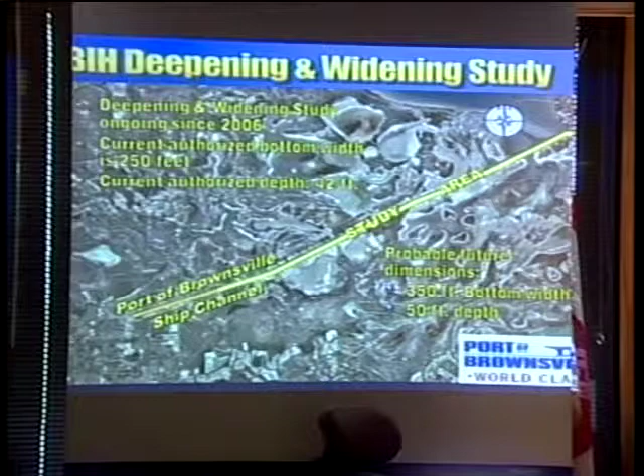Mr. Chairman, Board Commissioners, as has already been informed, there's been a lot of activity at the port. The first thing I'm going to report is just an update on where we are with the deepening and widening study. There haven't been a lot of major steps yet, but one of the main things we achieved this month was that we finally got the schedule to work.

A couple of things I did want to mention quickly: the shoreline wave impact analysis, we finally got comments, we responded to the comments, and they gave us back some additional minor comments. So by the end of this week, we will have that shoreline wave impact analysis completed.

The rig movement geometric study that was done had been completed several months ago. Last month we got a comment that they wanted to make a minor wording change in the report, so that is being done and completed as well.

The employment benefits analysis, to include the benefits of employment into the study, was scheduled to be completed on the 15th, but due to some delays in getting information from the lessee, the consultant is now telling us they will complete everything by June 22nd, which is when they will submit their final draft to us. Then we would work on getting that to the Corps immediately thereafter, so the Corps can also provide their comments, and then we can get that finalized.

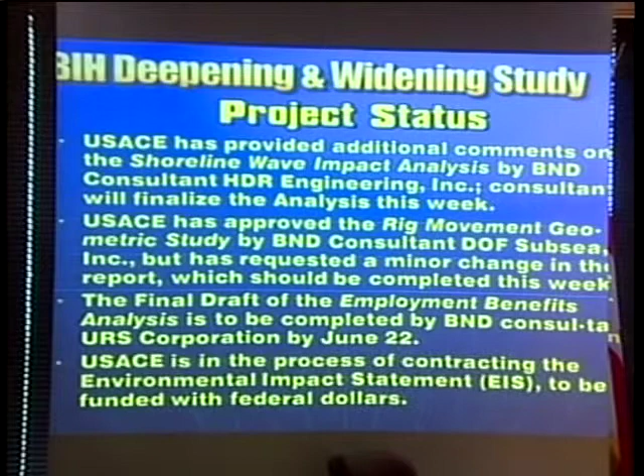And I've already informed you a couple of months that we're pushing the Corps to initiate the environmental impact statement study. There was even some possibility of us doing some of the funding, but this has to be done with federal dollars according to them, so it's still in their hands, but they were getting ready to initiate that within the month of June, so hopefully by the next time I report to you, we'll have that already underway.

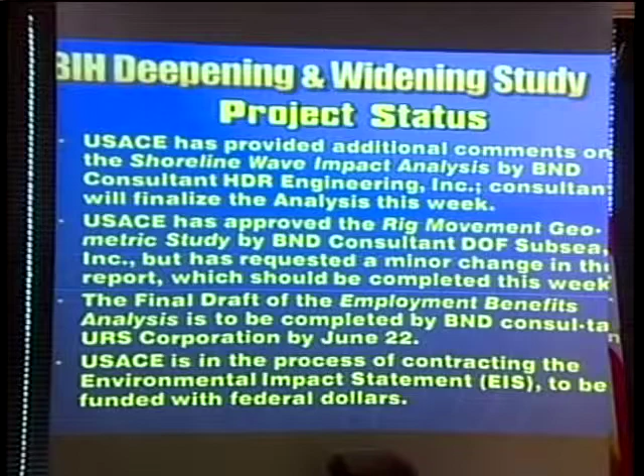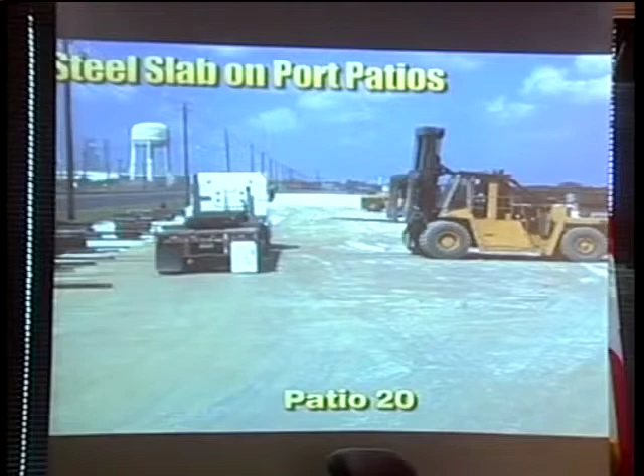One of the things we wanted to mention in conjunction with the finance report a minute ago is the steel slab that's been placed on port patios. Patio 15, as you can see, is already pretty much full with steel slab. 15 South has also been filled with slab, and here on Patio 20 we have slab coming in — this is one of the heavy activities we're having here at the port. Here you see a little bit of the activity with the forklift lifting it out of the trucks.

The first construction project we already reported to you was that Shed 1 was completed. Now we report that Shed 14 repairs have been completed here. This is shot up in the area — this is the area of the repairs.

All these that you can see - that's of course our maintenance director, right there inspecting together. And this is another shot.

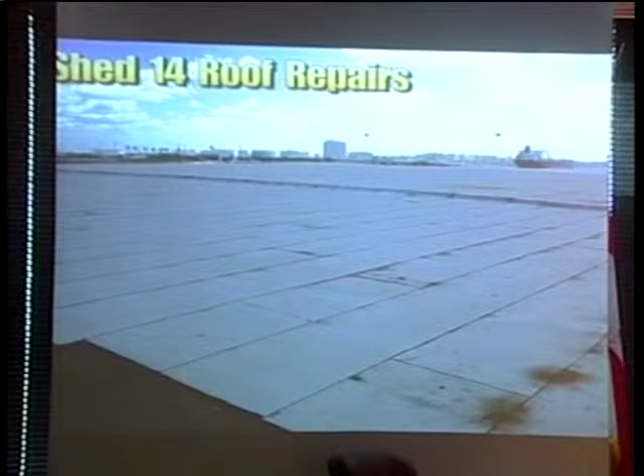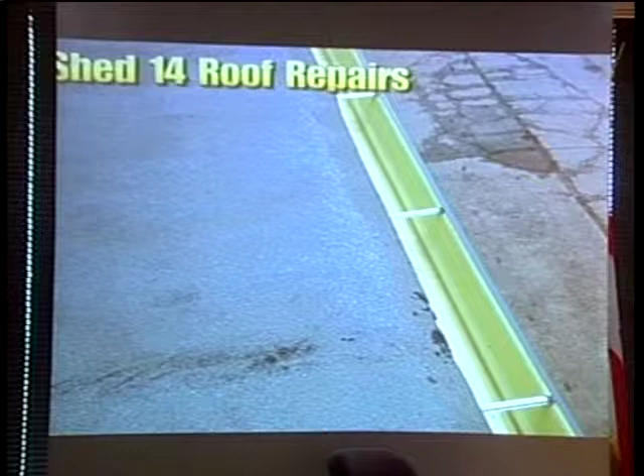Here you can see the new gutters that were installed, along the south side next to the rail. And this is a close-up of the new gutter there. Here's the gutter on the north side. That's basically a ship that was docked over there on dock number 3.

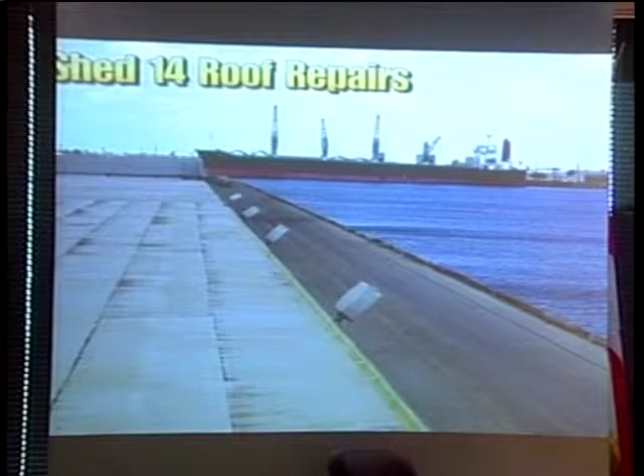The day of the pictures. Another project is this one being done in-house, the Mervis drainage project.

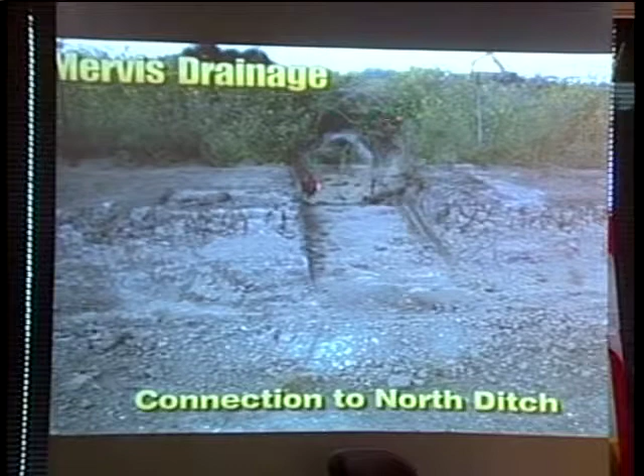We had a situation here where they had a ditch that was ponding and not draining properly, so we opened up a connection to a ditch. This ditch needed to be deepened, which is basically this ditch. Here's what I just showed you right now, and the water flows in this direction, which is basically southeasterly.

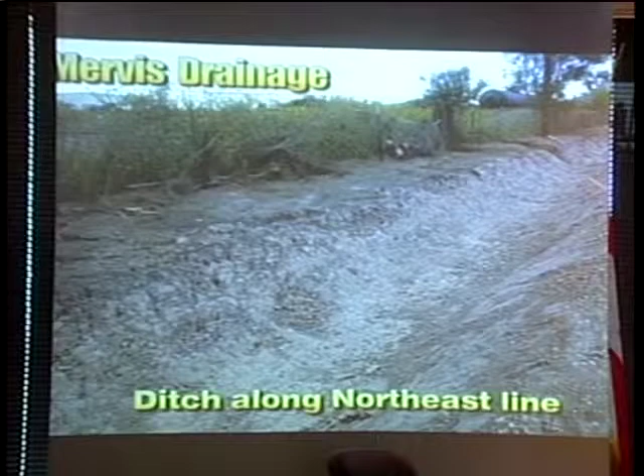Into this inlet - originally the ideal situation would have been to put a ditch all the way across here, but because there's rail here and BRG is contemplating putting another rail spur in this area, we couldn't leave a ditch, so we had to use a pipe, crossed under here.

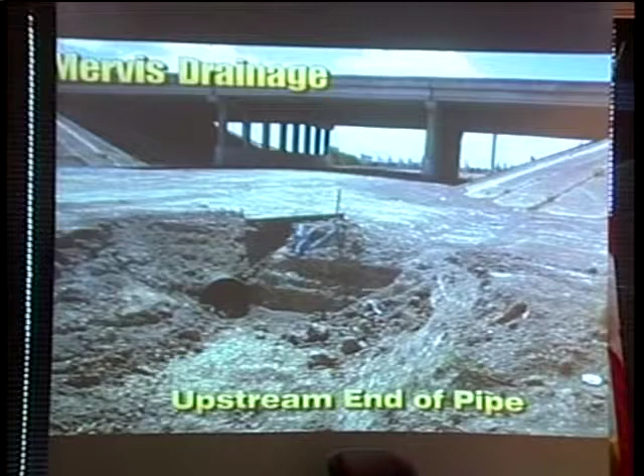This is the inlet on the northwest side of 48. This is the outlet on the southeast side of 48, and this is the ditch that leads into the main drain right here. This is now looking south, and this is the main drain.

Here's the port area right now, something being done in-house. We're waiting for a structure that's going to go right at this location, and this area is going to be filled. This ditch is not going to be there anymore.

We're going to have an inlet here that drains into this pipe, which is also going to be lowered and then discharging into the main drain, which is this big ditch right here.

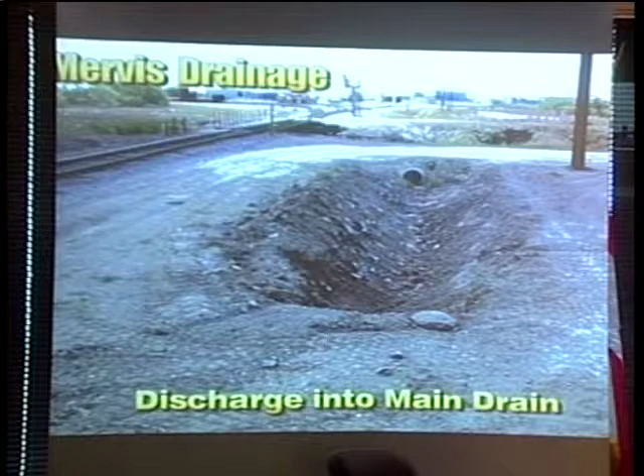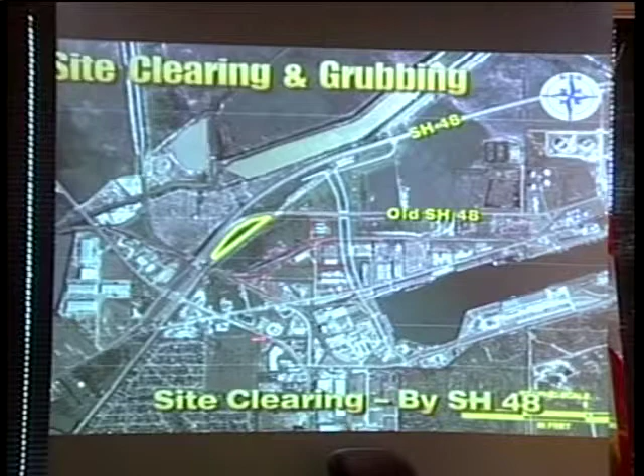Another project we are working on with in-house forces is site clearing and grubbing in different areas. One of the first areas I'm going to show you is this area right here next to Highway 48. Our maintenance crews have been clearing this area. I have just 4 shots that show you the whole panoramic view of the cleared area.

Then there are 2 other areas on the south side of the ship channel, east of Bay Bridge. This is the Bay Bridge lease, and there's an area here that was all full of brush, and the same right here. These 2 areas are next to Bay Bridge.

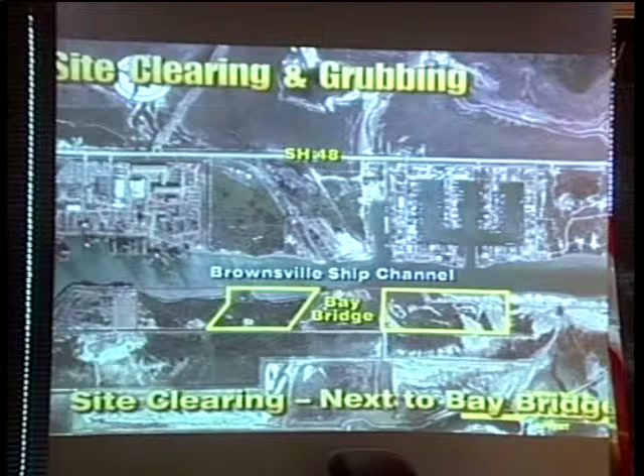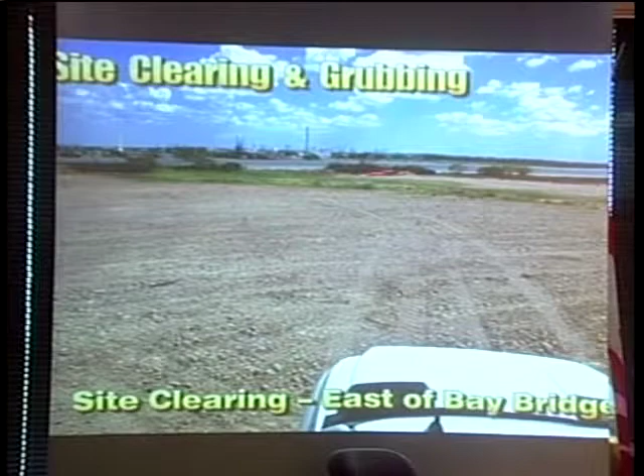These are just shots of the area cleared. Here, this is on the east side of Bay Bridge. And here is looking back down towards the ship channel, and this is back towards Ostos Road.

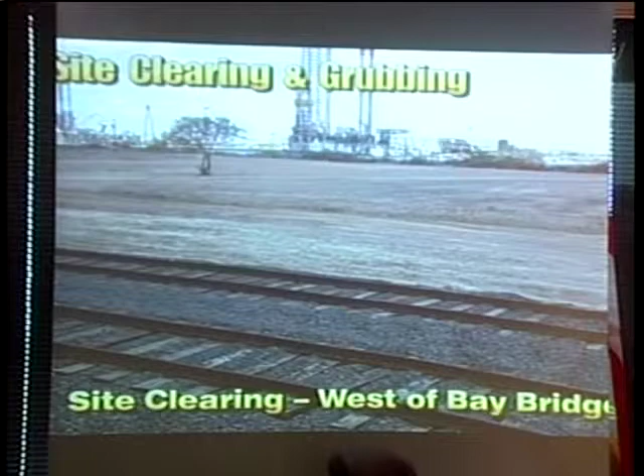This is basically the southeast area of that section, and here's the other area, west of Bay Bridge, with our own port maintainer working to clear that area. That's the whole area. Actually, at this time, there was a ship coming in, so we got a shot of that ship entering the port as well.

Here's a quick view of our - let me go back there. I hope I didn't mess that up. Of our maintainer doing its work. I shut off the sound - all you would have heard was wind.

Ariel, when you finish that, could you go back to the map that shows those 2 sites that we're working on? Ariel, on Highway 48, is that our crews doing that, or is that the state crew doing that?

Well, I'm going to show you another area where the state is working. The one I showed you was done by our crew. The state is working a little bit further east, getting rid of the ramps and all that stuff.

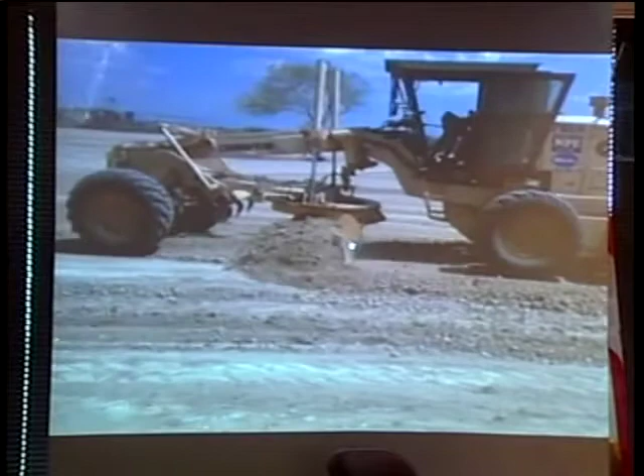Okay, what's this guy's name, Mr. Garza? Alan, there you go. Garcia - Alan Garcia is the one that's operating the maintainer.

And then if you look at it, the ship is right there, moving a little bit. That ship is coming into the port. Now, you want me to go back to the map? Let me go back to the map.

The point I wanted to make is that if you see the Rio Grande shredding, and then that other piece right there, that's the Fortune Ferris site currently under negotiation. This site here, you have Bay Bridge, and then you have this other site.

Those two sites are the only two left directly on the water of any significance that have utilities and all services in place. So we don't have much land left, and that's why we need to be selective about tenants. Anything beyond that, whether on the south side or north side to the east, will require utility extensions and infrastructure expansion. Everything else is under lease, except a little bit across the bay with a right of first refusal. So we're down to just a couple of spots left of land available, and the turning basin would be completely used up on the waterfront.

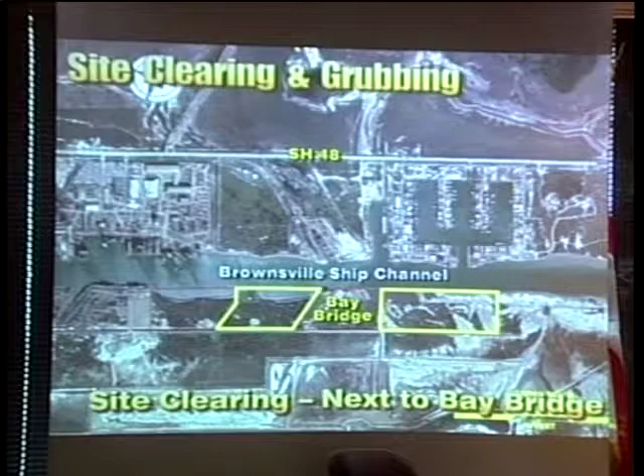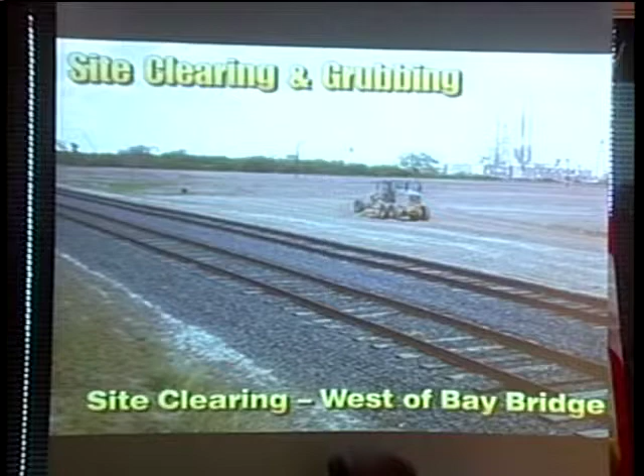So basically those are the sites. All these are in preparation, so we have them available to show. We think they'll show better that way. Absolutely.

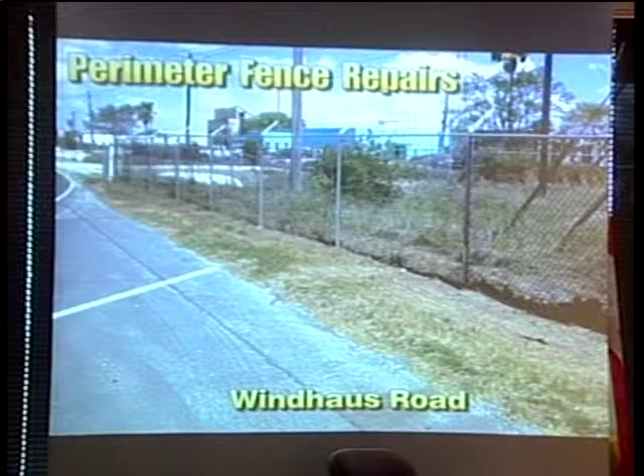So anyway, we'll skip this one now. Another issue, we've been doing some repairs to areas where we had problems with the fence. This is an area on Windhaus Road, and most of the repairs were on the barbed wire at the top. Here's a close-up of that. There's another section here where Milo and 511 used to intersect, and this is the area where the gate is a little bit east from here. But there are a lot more areas that, at the request of the Chief of Police, we didn't show you for security purposes, though they are being worked on and resolved.

Is that part of the fencing we applied for in the grant? No, this is just repairs. The other grant has been applied for, and some of the documents were being finalized today. I don't know when the deadline is. The 20th, but we got everything in today.

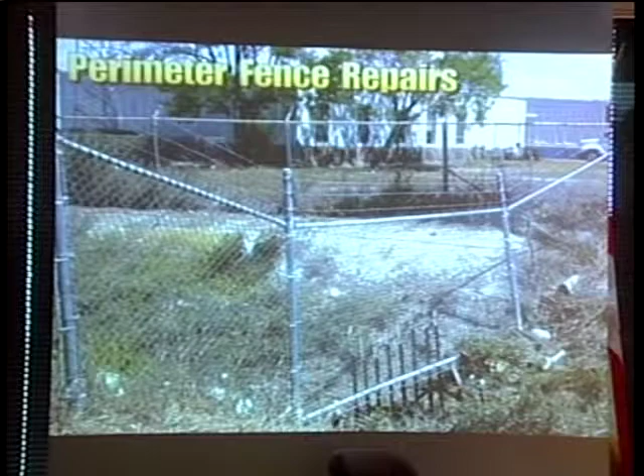This is our crews at an undisclosed location, finishing the repairs. We're continuing the work in the areas where it's needed.

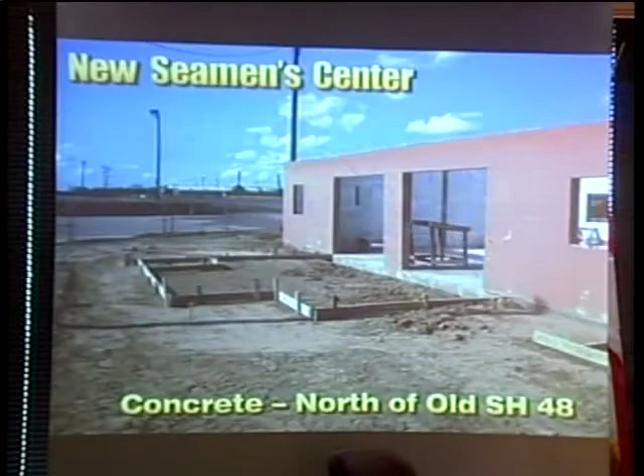Another project is, of course, the new Seamen's Center. You've got an item on the agenda today that we'll talk about when the time comes, but basically this is some of the work that has already been completed, some of the form work.

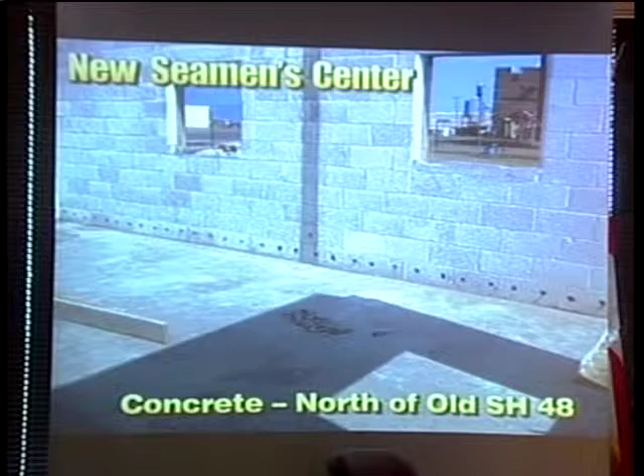Here we encountered an issue where there was no reinforcing on the walls. We selected one wall, the northern wall, and checked every section to make sure there was reinforcement needed, and none of the columns showed reinforcement. Here you can see the measuring tape coming in.

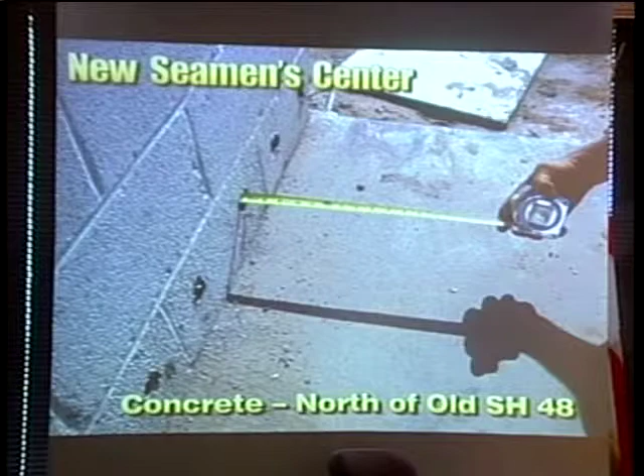So what you're saying is when we had the ribbon cutting and groundbreaking, it didn't fall on us, right? As windy as it was. In addition, we did go through a couple of hurricanes. More than a couple. We also had our own crews.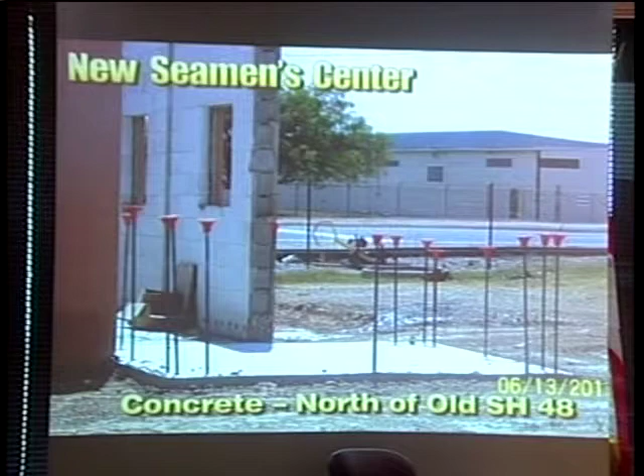This is the new area being added on the northeastern corner, that would be the Seamen's Center site. This is the steel reinforcing going up. Here we have some of our field crews working on the area up at the top of the pole, because we're cutting that service and putting it underground.

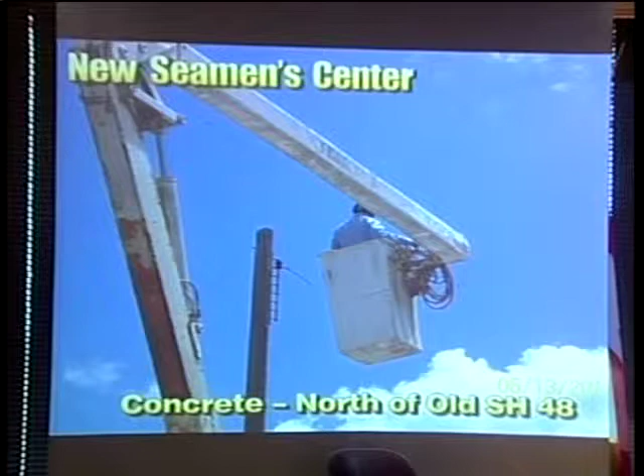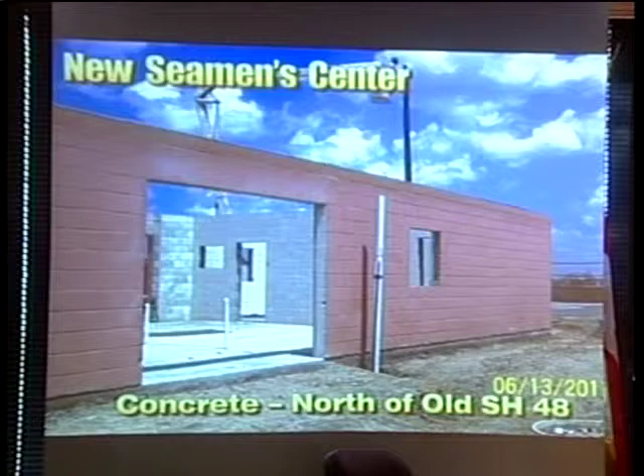There was an accident with one of the meters there, with one of the subcontractors hitting an existing meter and knocking it down. So our crews went ahead and cut everything off there. Here my lettering got in the way, but the guy's right there. That's part of the work we have on the Seamen's Center.

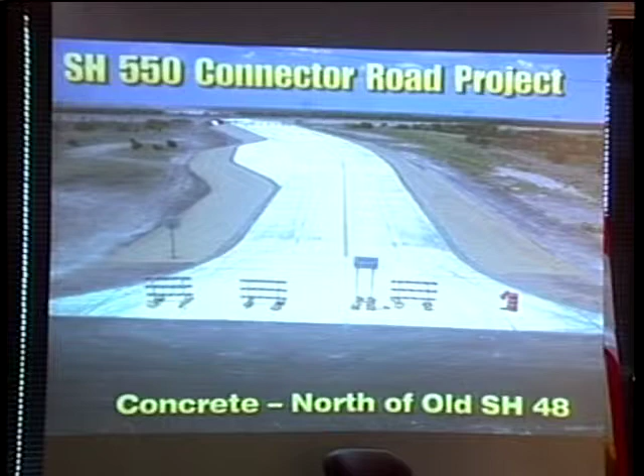On the connector road, it's basically completed here. We took our bucket truck and tried to get some shots from up in the air so we could get a full perspective of the whole project. This is the concrete area north of Old Highway 48, and this is sort of like a close-up.

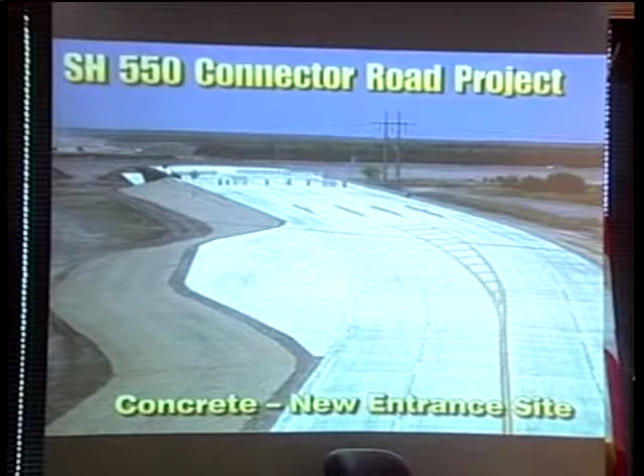Those barriers are where the new entrance gate will be. That's where the new guard shack will be, and it'll be a canopy. The new canopy will be located at that location, at that site.

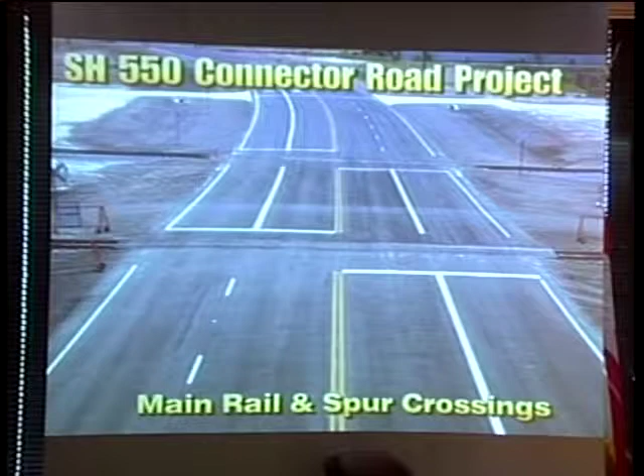Here's a look back into the port towards the south on the asphalt portion of the road south of Old 48. This is the main rail where they're going to be doing the automatic switching, and this is the rail spur that is there. This shot is from the Foust intersection with the Garva spur crossing right across that area.

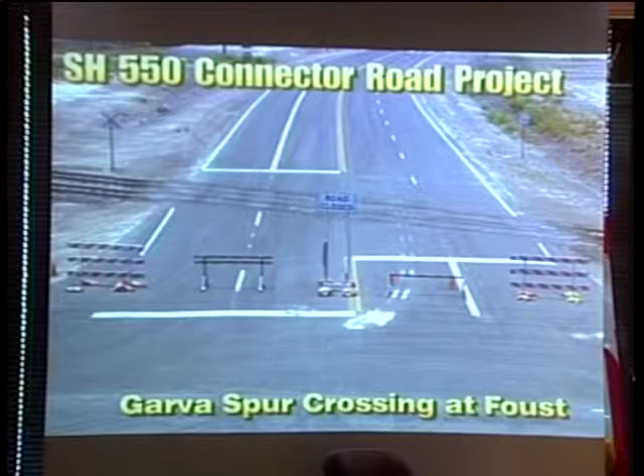So this is basically completed. We're waiting for the county to issue their partial acceptance on the portion to the south, but that's why we still have it blocked off right now. We do have a couple of tenants that use this to go in because it's their only access, but we're pushing the county to try to get that released to us.

So they asked the contractor to core it, and in fact, yes, some of the thickness that was supposed to be there, both of hot mix and base, was not there, so now they have to address that. That's basically where we're at with that, and as soon as we get that finalized, we'll be ready to close out the project. I didn't want to close it out leaving that pending, because it needs to be completed and in good shape before we actually close it out.

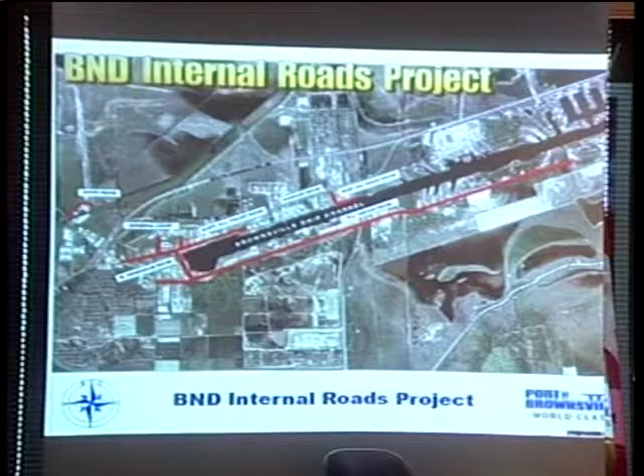So all the driveways are done? All the driveways are done. Everything else is done. It's just the remedial part on the problem areas that they have to finish.

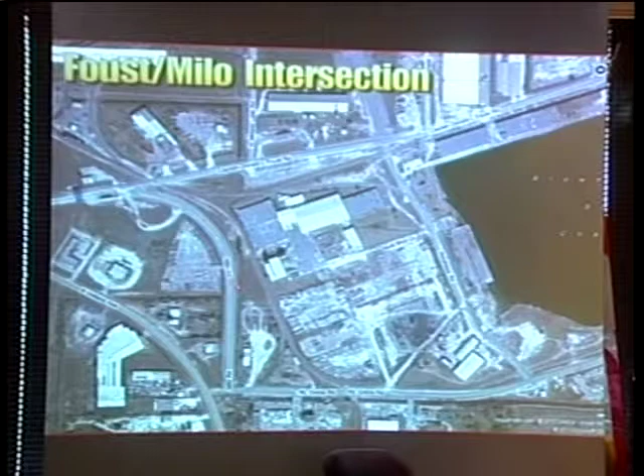Another project we're working on with a consultant from Houston is the Foust-Milo intersection. Everybody's aware of the strange angle at which Milo hits Foust. Here's a look of the area. That's an area that has been of concern for a while, and we are working with a consultant who developed several models and looked at several options.

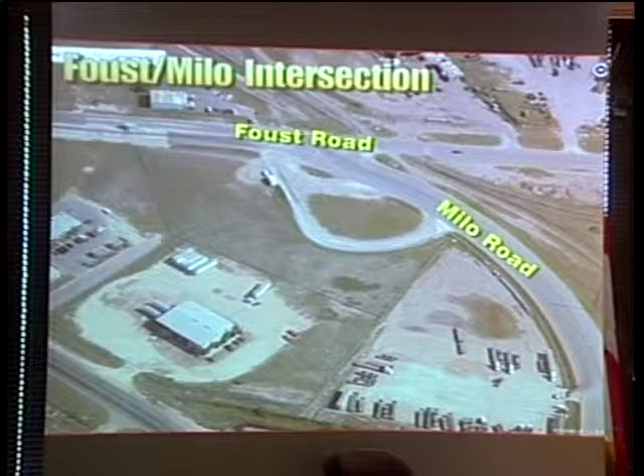Initially, he presented a redesign of the intersection using the existing pavement the way it was. But on the second iteration, he presented a new design where Foust Road would come in and turn and hit Milo at an angle. This is the result of traffic counts that were done through our cameras, through our own surveillance system.

Why don't they just go straight rather than come around? Right, come around and make that move. How come they can't go straight? Up at the very top, they're coming down and then going around? Because of the angle at which the oncoming traffic is.

One of the things we need to do with this is still kind of perception. We're going to need to have a workshop on this to actually look at all of the proposals. They're coming back to look at some additional comments and questions. I also think when we're ready, we're going to need to get all the stakeholders involved, because this is a major intersection. It's going to affect various folks, and we want to make sure we get a lot of input.

Even with that, it looks like they're going to wreck right there. We had some questions on what's come up even with that design. So when they have a chance to answer those questions, my plan is we need to have a workshop on this, and then go out into the port with the users and say, okay, there may be some things we're not catching.

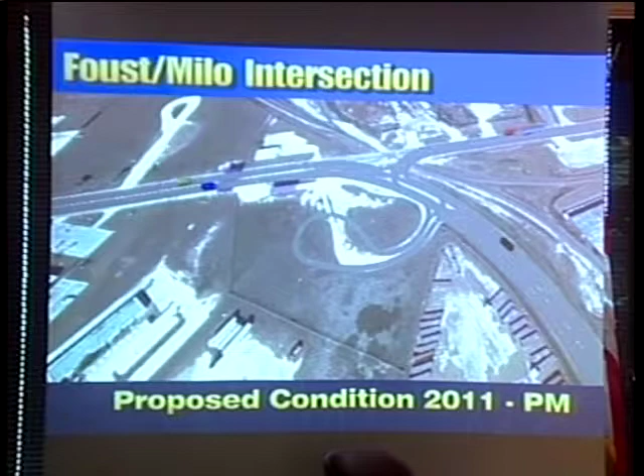Because you're going to have the command center here, right? You're going to have a road from here back there, somewhere in there. So we'll look at that.

The last project I'm going to show you is just an update of where we are with 550. Of course, the area we're looking at is the area right here that affects the port and backs up into

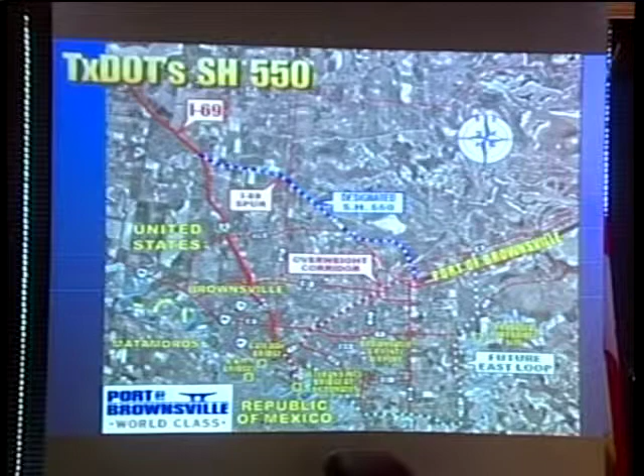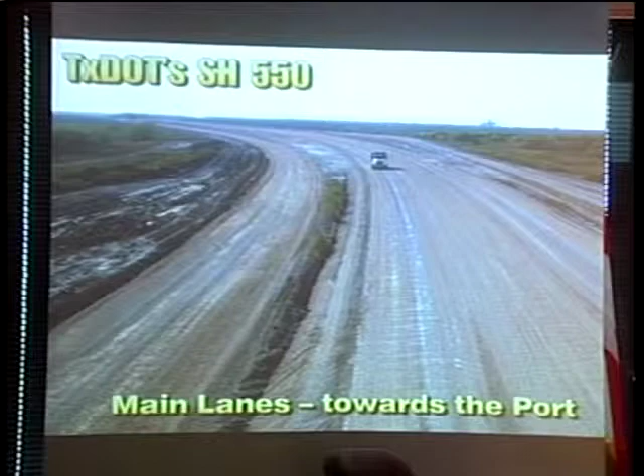3248. Here, this is a look at the main lanes looking towards 3248. This is a look back towards the port of the main lanes. As you can see, a lot of the area has already been surfaced with limestone, and that work keeps progressing.

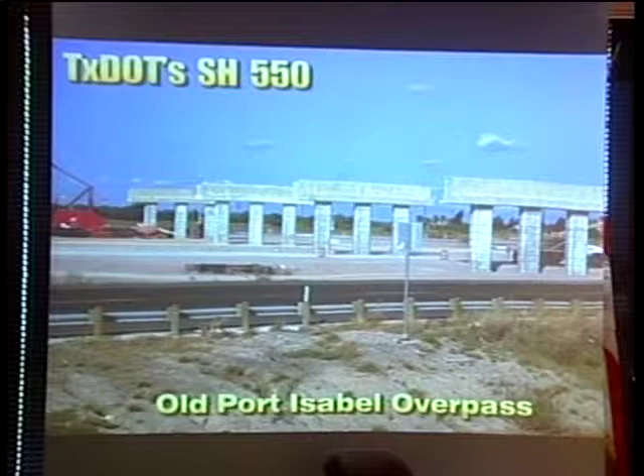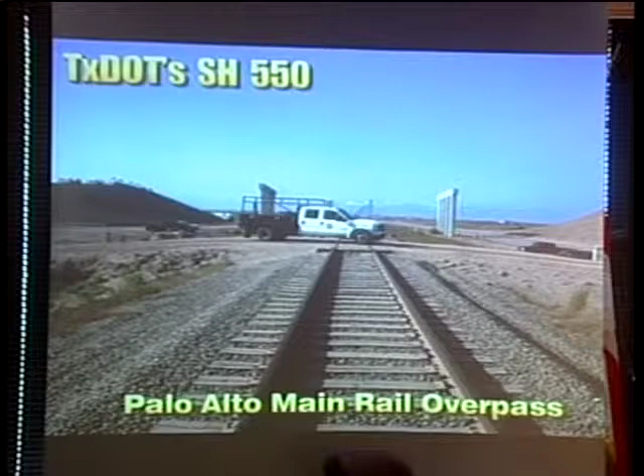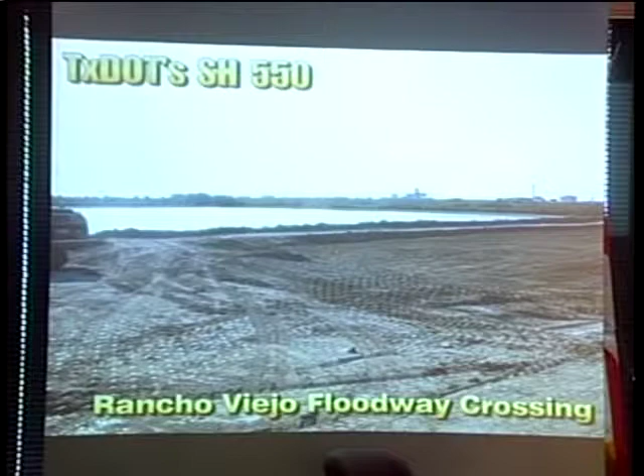Here I'm standing on the rail looking back south, and both these structures are already in place. This is another look at those structures. Here's a look at the area where the Rancho Viejo floodway is being crossed by 550. This is obviously the floodway, and this is the area they're filling in. There's going to be some culverts in place there, and this is a look upstream on the floodway.

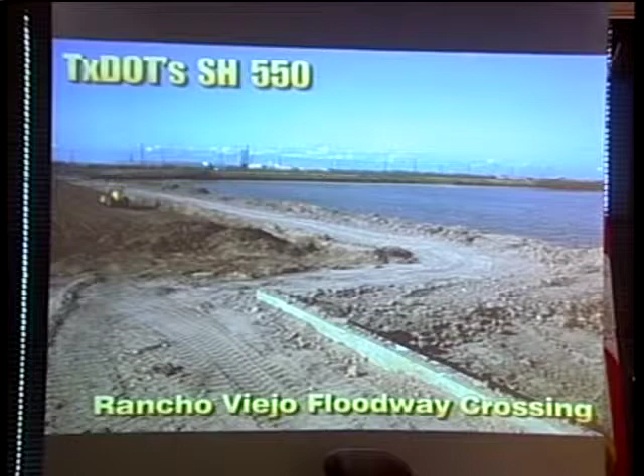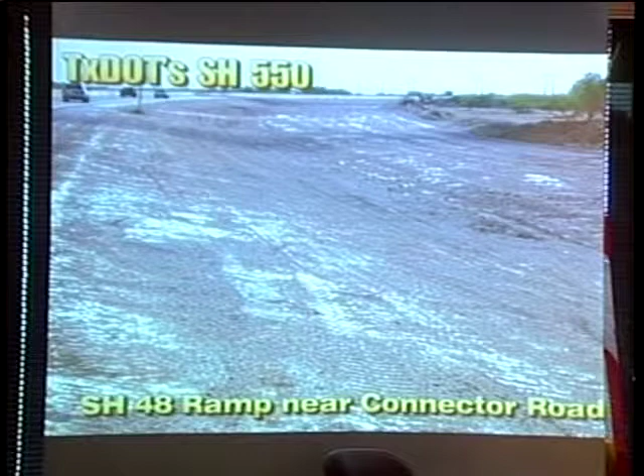This is the area where they're working on grading for the ramps coming off of 48. Of course, 48 is going to have an overpass over 550 - 550 is going to be at grade, and 48 is going to be over it. So this is the area where the state is regrading to set up the ramps coming into the port. This is a ridge coming into our port, and this is our 550 connector.

And that's basically it. This is a shot courtesy of George - one of Tommy's workers, Juan Martinez. This is right in front of Gulf Street.

Last week, some geese. They're not geese, George. Well, they said they were geese. No, wood ducks. What is it? Those are ducks, whistling ducks. Yeah, they're all over my yard. They're good eating. Five people said geese. They're not. Thank you very much. If there's any questions - there won't be no geeses here.

They're gooses. Gooses? Geeses. Oh, they're gonna need this. Yeah, they're gonna need that. We have to go back. Yeah.

Beautification Committee presentation. Item number 5, presentation by the Brownsville Beautification Committee regarding the placement of a welcome sign on Brownsville Navigation District property. We're up to item 4. Well, they wanted it out of order. I'm going to say we can take that out of order because we are going to need the overhead.

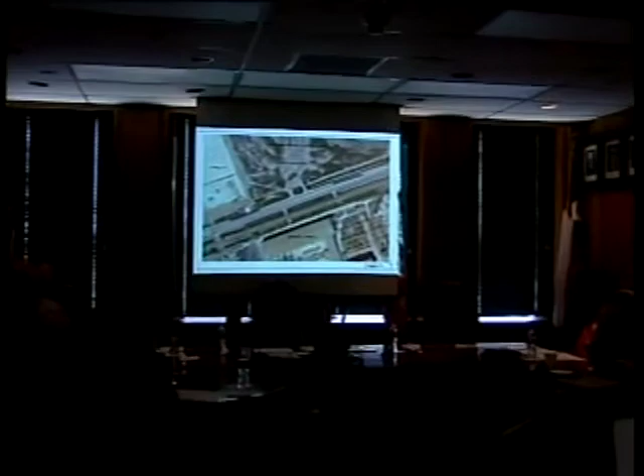What I'd like to do, Mr. Chairman and members of the commission, we have representatives of the committee, Cynthia Galvan, who is the chairman of the Brownsville Beautification Committee, and also her team, Scott Pajeski, are here. If you recall, this is a discussion we've had sometime last year. Commissioner Cowan was contacted about the possibility of looking at a welcome sign somewhere on 48. That started a dialogue last year, qualifying fiscal year for the Beautification Committee. Since their funding comes from the city of Brownsville, we're trying to accomplish something before the end of the fiscal year. We weren't able to do that, so we've restarted that whole discussion again, looking at a possible site on Highway 48.

I can tell you that we've met with the Beautification Committee. We looked at multiple locations. I believe that they have settled on one that they believe will work. The other issue from the very first time this came to us, you may recall that the sign was like a 3D dimensional sign, a billboard made to look like somewhat of a welcome sign with the City Hall, old City Hall type deal. We had expressed some concerns that we had thought it was going to be more like a monument sign, the one that is off of the expressway. So, taking all of these discussions into play, the committee has gone back and come up to this point, and not to diminish any of the presentation or the unveiling, I guess I should say.

Let me go ahead and just simply turn it over to Mrs. Galvan and let her proceed.

Hi, well, thank you. Like Mr. Campirano said, we've gone back and forth and met with the city officials and also with the Brownsville Beautification Committee, and we have a new proposal to present to you guys, and we hope that it is acceptable. As a beautification committee, we've really been charged to beautify the entryways to the city of Brownsville. The Welcome to Brownsville signs, this is going to be the third one that the city beautification committee installs.

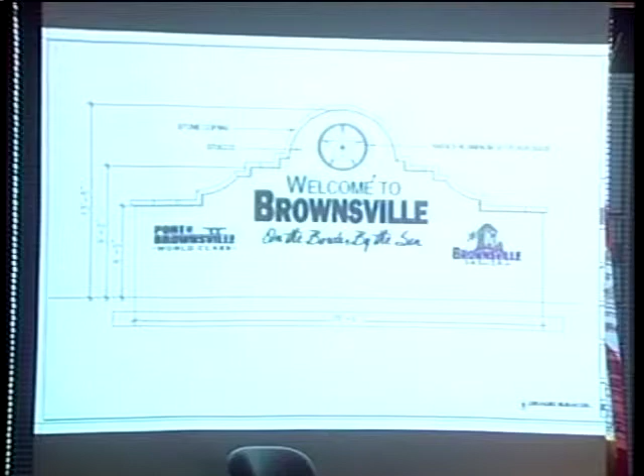So obviously that would be a day view, and our thoughts would be to provide nice lighting at night. I think at night it would probably have even more impact because there's not a lot of lighting in this area, so if that was well lit at night, it would really stand out nicely for people coming in from the island or Port Isabel. That's just a quick simulation, and the next slide is a combination of all four of those, which you have in your packet.

So one of the things Cynthia mentioned is that initially, the initial proposal we worked on, we were trying to fit within the budget allocated from the city, which is about 30,000, a little over 30,000.

Right now, based on some signs like the Welcome to Brownsville sign, the Welcome to Historic Brownsville sign, that one was done about 7 or 8 years ago, and that one cost in the mid-40s, I think 45,000 or something. So obviously we've got cost increases over those 8 years.

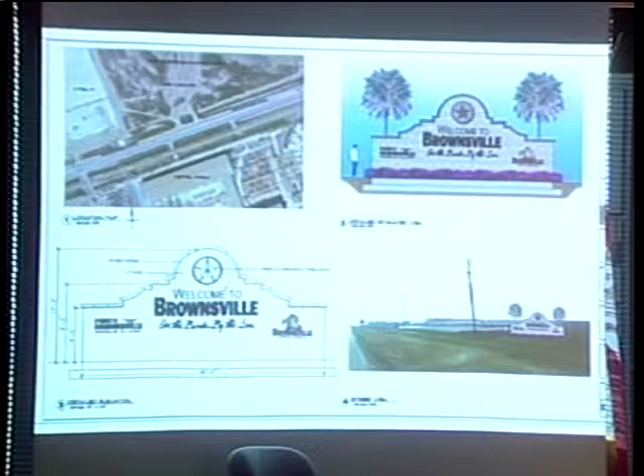I agree. Actually, in that image, it's not really clear, but believe it or not, we have shown that. Can you see a little bit? We've actually shown it about 2 or 3 feet above grade, and that's for visibility and drainage.

We don't want it sitting in a low area where we'll have floodwaters. Also, one thing we have to be careful of is if we raise it too much, we'll probably need piers or pilings, because we need to get some concrete into existing grade for structural integrity, since we can't set that slab on all brought-in fill.

So if we stay in that 3-foot range, we can have a big spread footing that's maybe 36 or 42 inches in depth, so we're down into the existing grade, which is important. So you've already figured that in. Let me think.

We've done this before. Oh, I know, we're also looking at probably next year doing one on the north side of Brownsville off of 77/83, and we've been looking at doing that one on a raised berm as well for visibility. That definitely sounds like you've thought of everything. Well, actually, we've been working on this for a couple of years.

Scott, can you explain how the maintenance of the area works, and also if it were to get graffitied, is it a material that can just be washed off? Well, right now we haven't gotten to the detail level of what the actual finish is going to be. I was thinking it would be CMU block with probably an elastomeric kind of stucco, EIFS kind of stucco material, which...

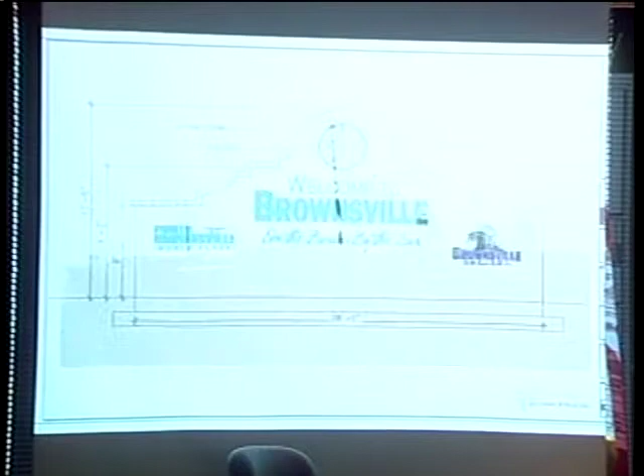My only question would be, Mr. Campirano, if in the future we have a future tenant that might need some of that space, that we be able to move it on whatever tenant expense for them to move it. That would be my only concern. Well, the other thought we had was that you essentially would carve out that corner, and whatever tenant would come in would have a sign on their northwest corner of their property line. So you can see it's away from what used to be a tenant over there, and there's already a drop there, but carve it out where we would simply take that out of what would be a potential lease.

Now, what we may want to work with a tenant on is not to diminish what we think would be the sign, but whether they would have some element of screening and what. But that's something we would work with a tenant on down the road. We've kind of given that some thought.

So, Ralph? Yeah, where would the traffic light go? Would it be down over here by where it says 48? No, that is all pulled. The traffic light would be aligned - when we get into that discussion, it would be aligned with the entrance to Amfels, Keppel Amfels, and that's still a little bit further west. Because theirs is a little bit further, just a little bit further down, a little bit further this way. Right there with C-48, see where the cars are? It would be like here, right in there. Okay, and then U Pull It is down a little bit. Yeah, okay, that answers that.

And just as a note, that report had some errors that they needed to correct, so the final draft is still, I haven't seen it. Okay, I know we're working on it. It's a work in progress, but I just wanted to make sure.

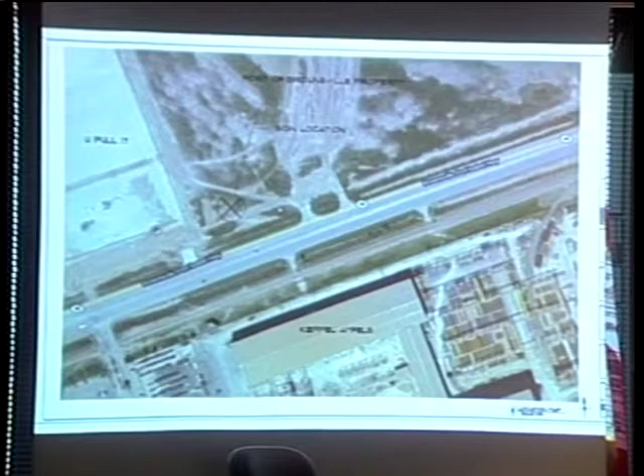Well, great, I think it's a great project to be working on. Well, Scott, thank you very much. Thank you, we're happy to be partnering with you. Yeah, it'd be a nice joint project to do. So we'll plan to maybe - how would you like us to come back? Just work with Eddie and Donna, whoever you've been working with, and when he's ready to bring something to the commission, he'll bring it before us. Thank you very much. Thank you. I appreciate it very much. Thank you.

Okay. Keeping your chair warm, man. Yeah, it's nice and warm.

Considering action on the following consent agenda items. Item A, approval of the minutes of the regular board meeting of June 1st, 2011. Item B, approval to authorize payments over $25,000: Item 1, Danny Ibata Construction, second progress payment for roof repair project for Shed 14 in the amount of $59,184; Item 2, Danny Ibata Construction, 10% retainage of the roof repair project for Shed 14. Item C, approval of the following leases: Item 1, Rifle Marine Supply, Inc., new lease; Item 2, Snodgrass, Inc., release; Item 3, Jonick Lopez International Transport, LLC, amendment.

Mr. Chairman, Mr. Lopez has said he's abstaining from 4C3. Okay, you'll want to have a separate vote on that.

Is there anything else we need on B? Everything's good? Okay. I'm going to need a motion on A, B1, B2, and C1, C2. So moved. Second. Moved and seconded. All in favor? Aye.